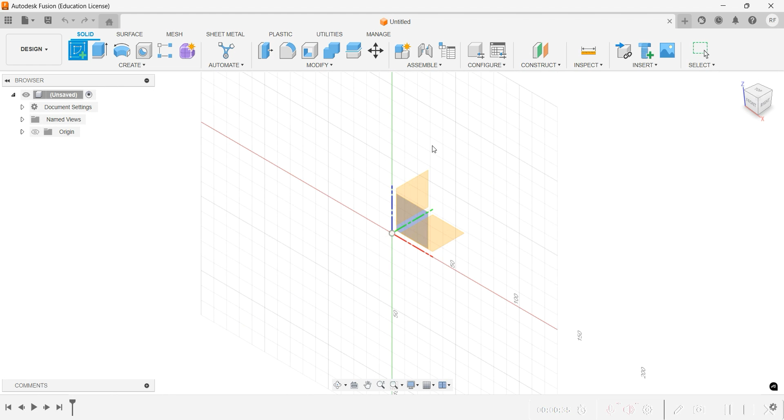Another rule we will refer to is R403, which reads, the numbers must be a minimum of 2 inches in height, with a 1/4 inch border surrounding the numbers. With that information in mind, let's get started. First, we're going to create our sketch. I'm going to choose the bottom face, but you can choose whichever face you want to use.

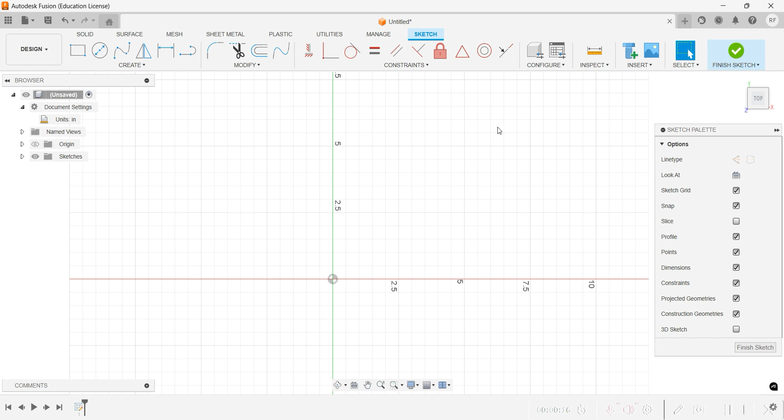Next, you're going to want to go over here to Document Settings and Units. Make sure that it's in the right unit that you need it to be. I'm going to have mine in inches, but you might be working in millimeters. Next, we're going to go to Create. We're going to go to Text. I'm going to make a box. In this sample text, we're going to put our number for our robot. Then we're going to put the height as 2.

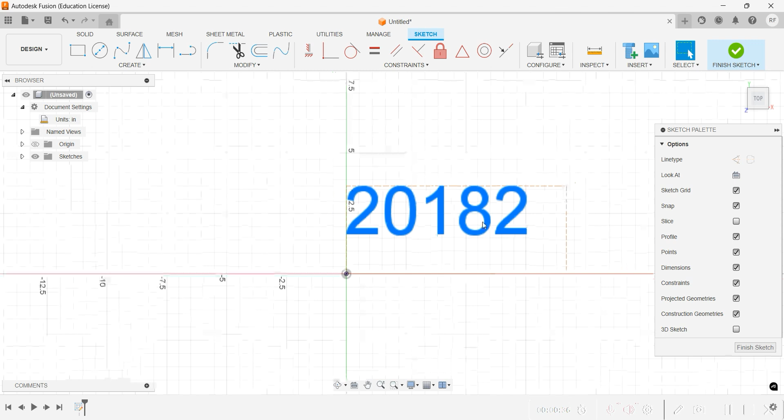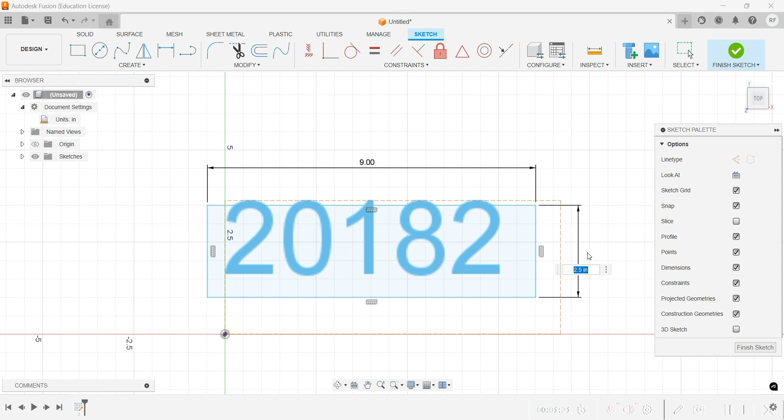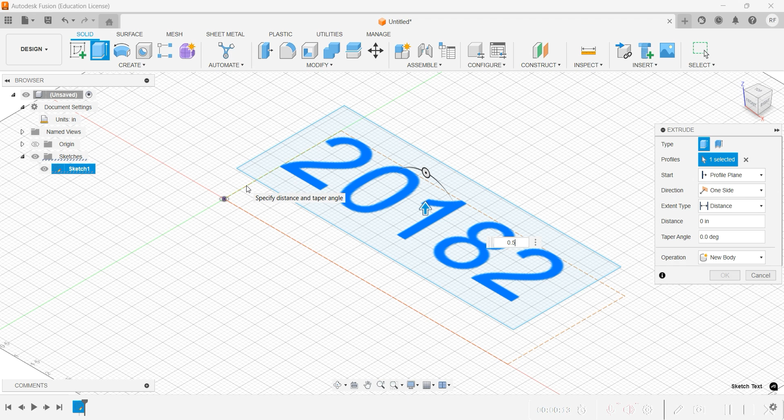When you're done with the sketch, hit Finish Sketch up here with the green button. After that, you want to press the numbers so we can extrude them. I'm going to extrude my numbers 0.50. If you accidentally hit Enter like me, all you have to go into is Sketches. Since we have the box and the numbers on the same sketch, we just have to press the box again and hit Extrude. Now I'm going to put my box as 0.20.

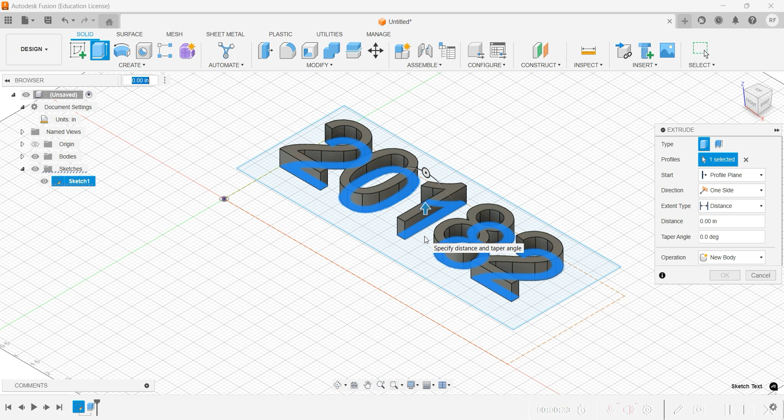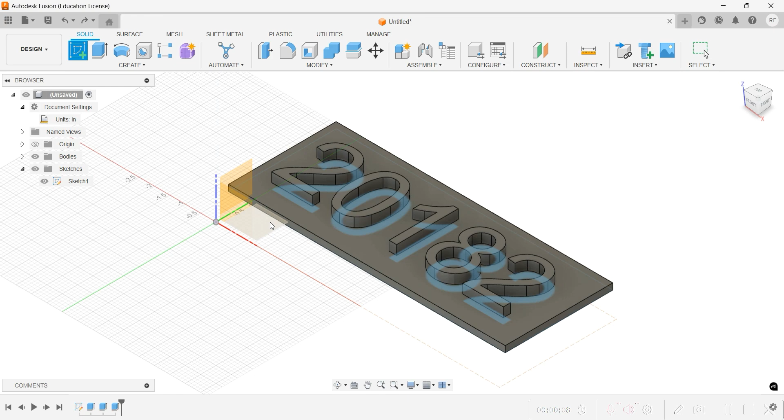Once you're done extruding the plate and the numbers, we're going to go back and create a new sketch. Then we're going to go on the bottom face, and we're going to go to Create and get a point. These points are going to help us mark out where we're going to place our holes, and they help figure out how to make everything even and straight. Perfect. After you're done making the 4 points, you can finish the sketch.

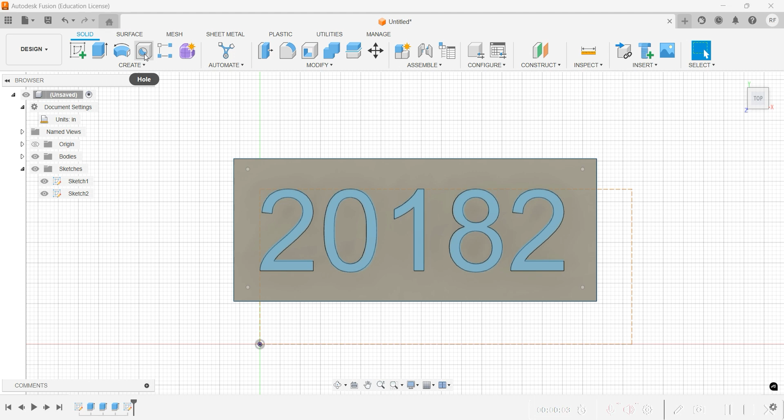After the 4 points, we're going to go to Create and click Hole. Now you're able to press on the points and you have it so the hole is hooked on the point. Now I'm going to put my hole as 0.30, but your bolts might be different. So make the hole specified to your bolts.

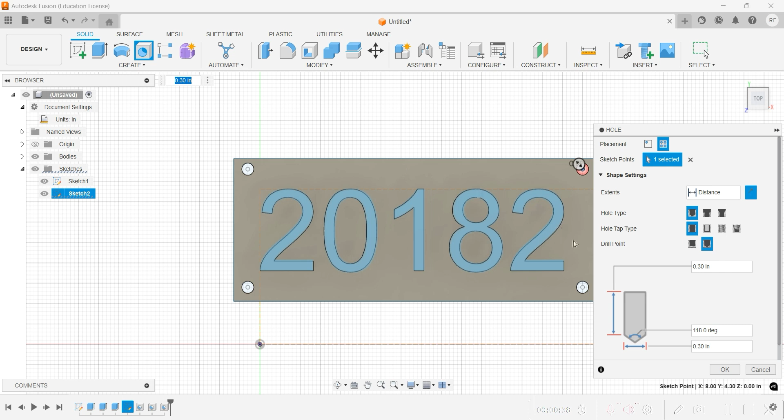Now you've built your very own plate for your robot. I hope this helped you navigate Fusion and create the plate.